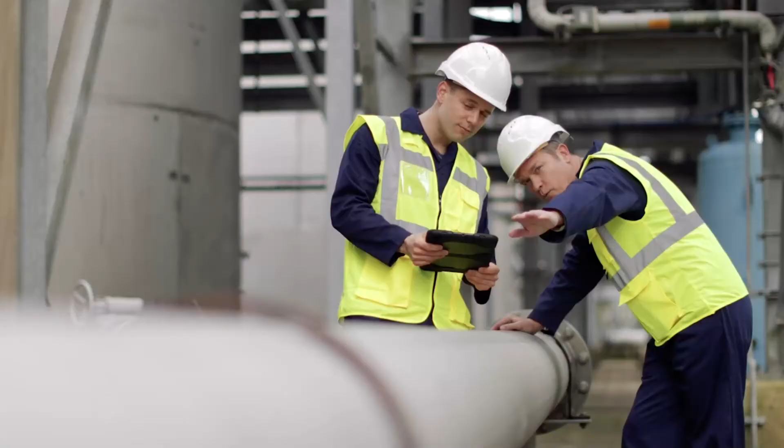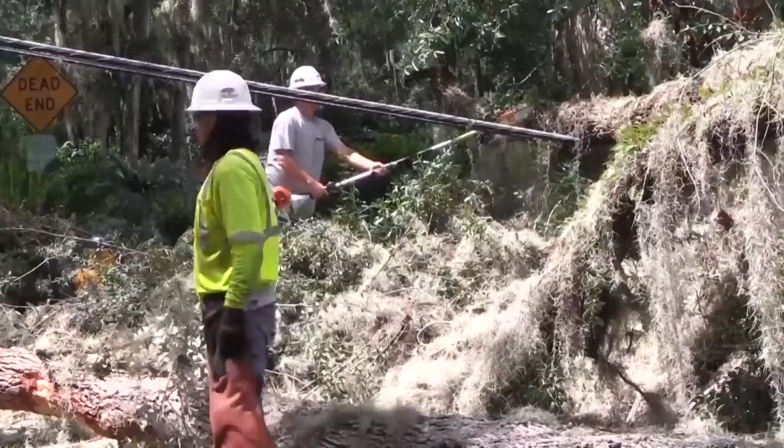We are a community of possibilities, never content with the way things are. What is possible propels us forward. We see the possibilities by knowing where your assets are located, knowing where critical issues are unfolding, knowing where your best work is being performed. Location intelligence helps you support sustainable growth, brings a community together, and helps you explore possibilities for the future.

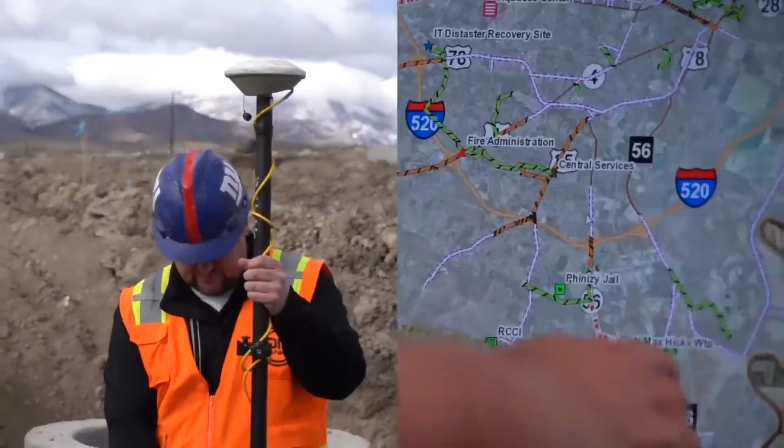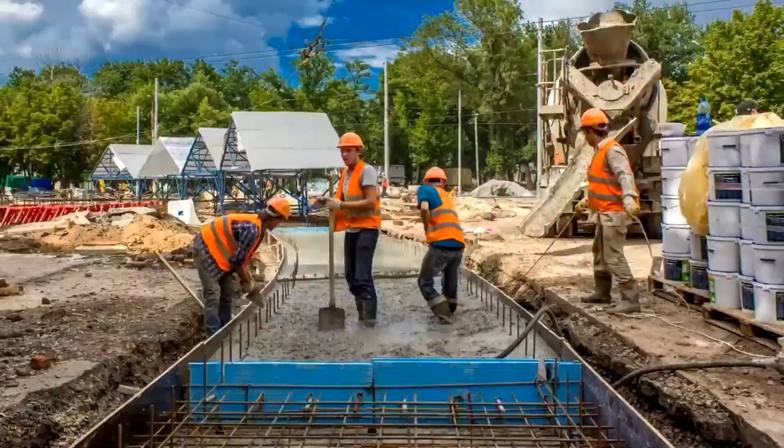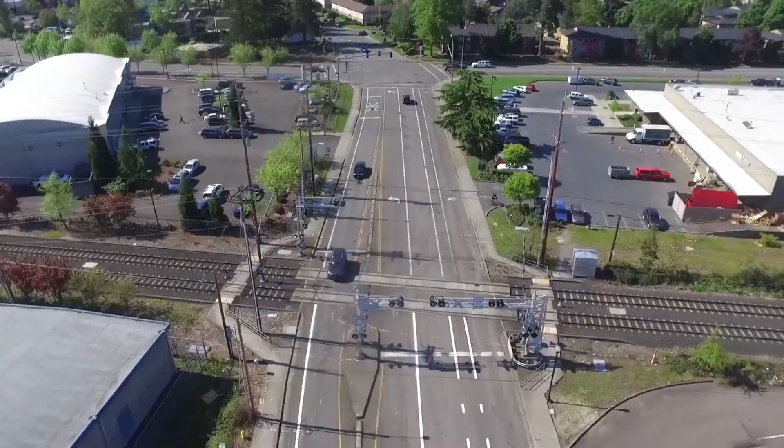You empower GIS intelligence to identify risks, reduce costs, share critical insights, solve problems, and work more efficiently. Together, we empower citizens to get involved, to live better lives, protect their neighborhood. These are the communities where we live, where we serve, and where we become connected. Together, we create endless possibilities. Together, we are transforming the way communities work by empowering GIS intelligence.

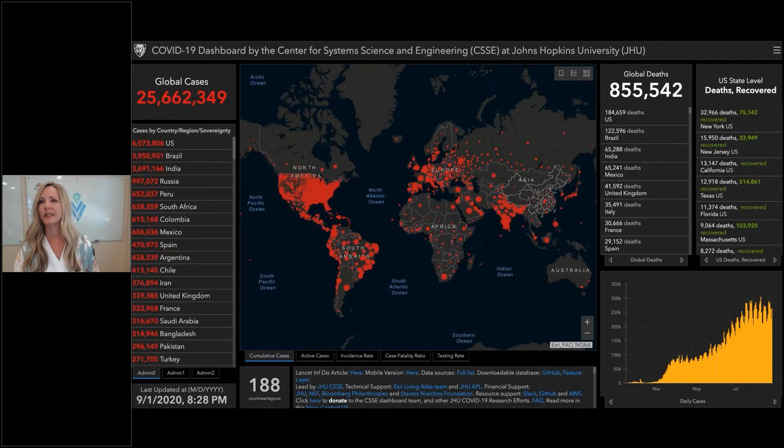And so I've got a question for you, it's actually a poll. What is the biggest change during the COVID lockdown that has impacted your organization, you or your organization? And you can answer as many answers as you want, actually you can answer them all. So yeah, it looks like the majority is we really can work from home and be productive, and not being able to interact in person. And I have to agree, I think those two are definitely fitting.

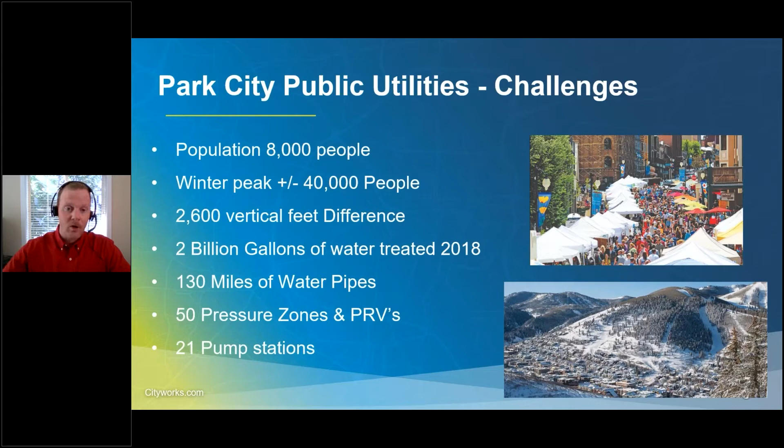As a water utility, we have several challenges, including a population of about 8,000 people with a huge surge in water demand during the winter. Being located in the mountains, we have a couple thousand vertical feet between our highest and lowest points in our service area. Although we are a small municipality, we have a fairly complex water system.

For a little background on our GIS and Cityworks programs, we have a pretty solid GIS program when it comes to our horizontal assets or horizontal data, which includes standard GIS data such as points, lines, and polygons, which represent things like pipelines, meters, hydrants, things like that.

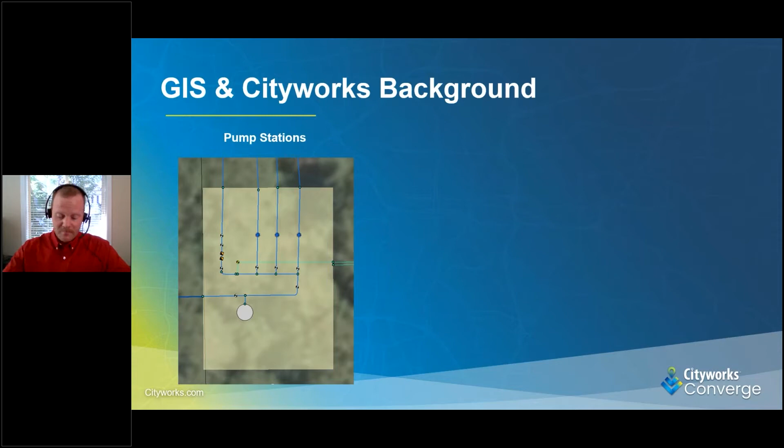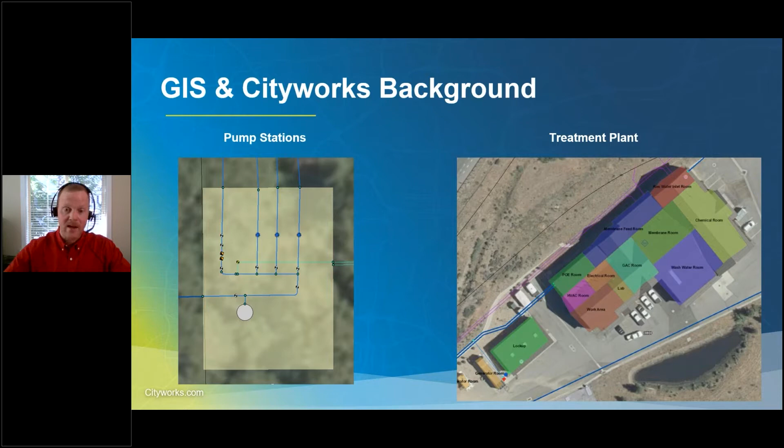But when it comes to our water facilities, specifically our treatment plants, we've had some major problems. Our pump stations have been populated with horizontal data, and starting out our Cityworks program, everything, all the work orders and inspections, were based off of those features. However, with our treatment plants, our GIS capability just hit a total wall and we are unable to inventory anything. We have 2 treatment plants and we're building a 3rd, so this is a pretty big issue.

Here is one of our rooms in our treatment plants, and as you can see, there are pipes going everywhere in every direction. There's assets just crammed together and stacked all on top of each other. There's so much going on. If you tried to draw these assets out like our pump stations, it wouldn't really be legible, or it would be really difficult to navigate in something like Cityworks or ArcMap.

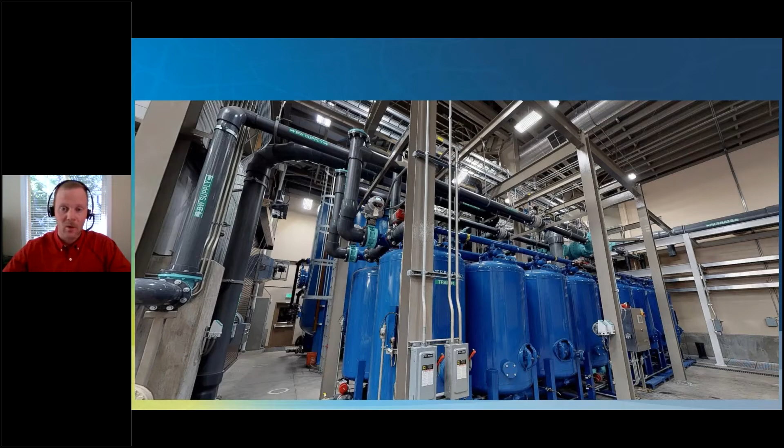Here's another room showing a membrane rack, actually 4 membrane racks, and they have loads of assets just all on top of each other. Some of them are the size of a deck of cards, so it would be really hard to represent them as a point layer.

So long story short, we had absolutely no assets of our treatment plants inventoried in GIS, which means we couldn't do any work activity, maintenance work orders, or inspections. To mitigate this, a couple of years ago we decided to launch our vertical asset program, not just to inventory our assets, but also organize them in a meaningful way, and to enable us to do work orders and inspections on these very important assets.

We decided to do this entirely in-house using our own resources, which essentially means me and a handful of other people were responsible for launching this program.

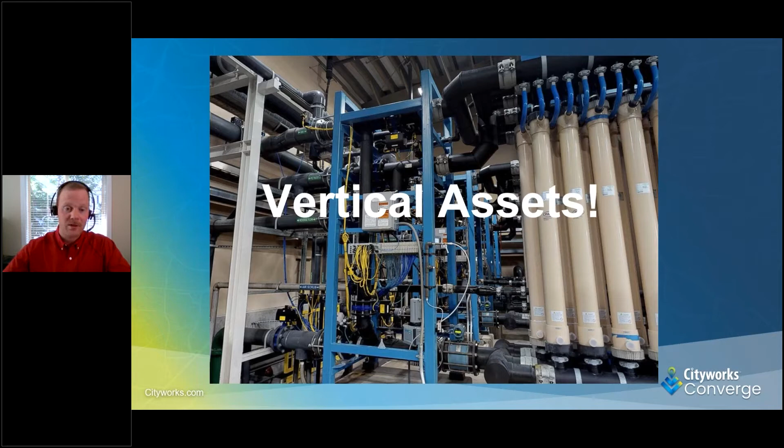A lot of you might already know what vertical assets are, but just a quick recap. Vertical assets are assets comprised of multiple components, or they are components themselves. They are typically inside complex facilities and sometimes referred to as above ground assets. They are often stacked directly on top of each other or configured in such a way that makes them not easily represented with your standard GIS data or on a map.

These assets are records in object tables, or tables in a database, with relationships to other tables, groups of tables, or features in some form of a database structure. Although these vertical assets lend themselves to very complex facilities, they can also help represent much simpler data, as you'll see at the end of the presentation.

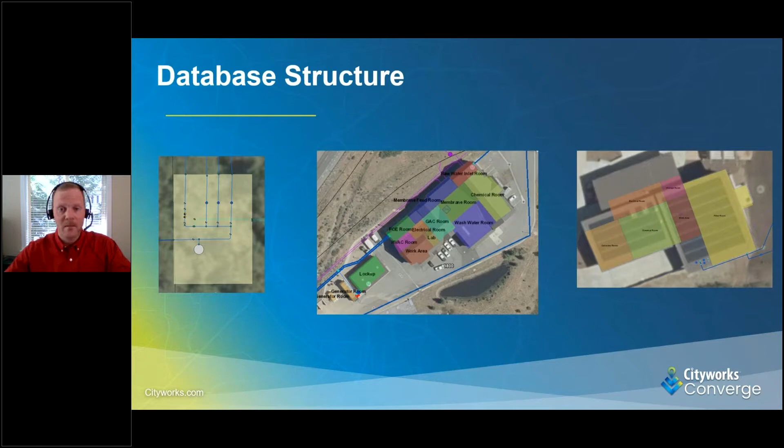To start this program off, we already had a water facilities polygon layer. All we needed to do was divide the treatment plants into different polygons, and we split them up by the actual rooms in these plants.

The next step was deciding which assets we wanted to capture, what we wanted to capture. So we created about 30 object tables to represent everything that we wanted to capture.

Once we had that established, we created this hierarchical database structure, starting at the water facilities polygon layer up top, which relates to the system level, or system tables. These tables don't have any assets themselves; they just help group the object tables, which is the third level. This level is where all of the assets live, or all the records and assets are.

So this is how Park City set up our structure. It's really customizable and you can configure it any way you want. We originally started with 4 layers, including a process layer, but after a while we determined our system wasn't necessarily complex enough to justify that extra layer. So we changed it to 3, and it worked much better for us.

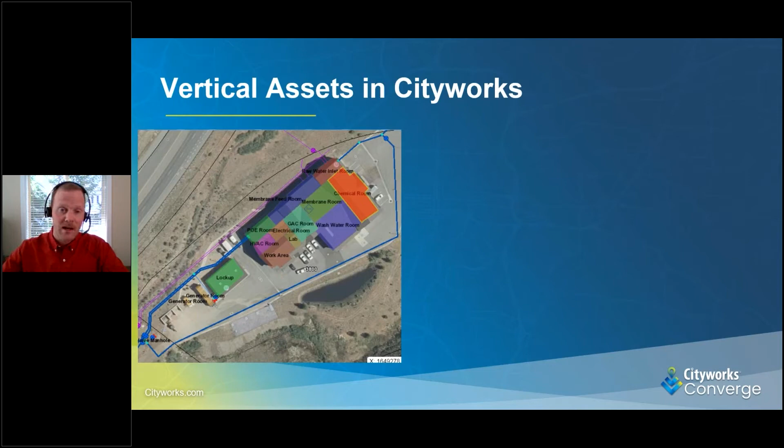What's really more impressive here is the assets that aren't being shown. In our system, we have about 3,000 vertical assets collected, and it's awesome that we can instantly sort through all this stuff to find the exact assets we're looking for. It's so much faster than trying to search through the asset search tab in Cityworks. So this is a really efficient way to do this.

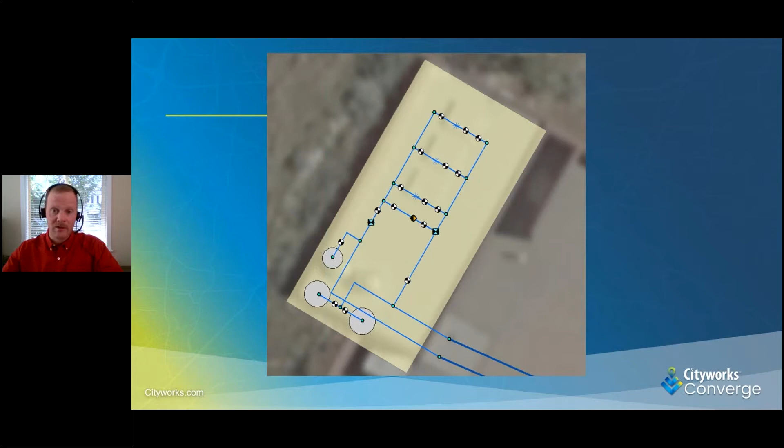All of the official inventory and all the Cityworks stuff now for anything inside a water facility is pointed at these vertical assets. This is also a good demonstration of why we set the database structure up the way we did.

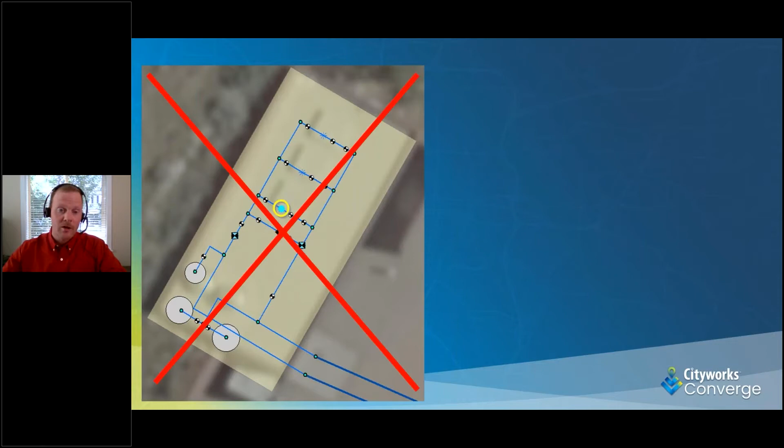All right, a quick recap: in the past, to create work orders we would select these features in the pump stations to create work orders and inspections off of. But now we no longer do that. Instead, we select the polygon itself and then navigate through the asset hierarchy to find the assets we are looking for to create work orders and things off of.

So this is how our vertical assets look in Cityworks. Now we're going to briefly talk about how we're using Cityworks with vertical assets in our department. Starting with the distribution group, they've been using Cityworks the best, and they are our best group of Cityworks users in our department, primarily because they started a long time ago when we had Cityworks running off horizontal assets.

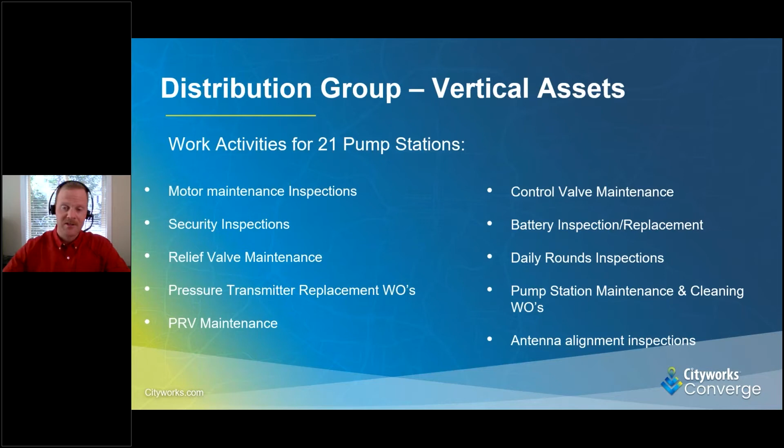Here is a list of work activities they do. They work with meters, motors, valves. They do daily rounds, inspection on SCADA equipment, and all sorts of stuff for our 21 pump stations.

Here is a quick example of an inbox for our pump and motor maintenance inspections. Pretty straightforward. As you can see, for a general work order you can't tell if the asset is related to the work order, if that's a record in the table or pointing at a feature. So this really made the transition easy for the end users when we moved to vertical assets.

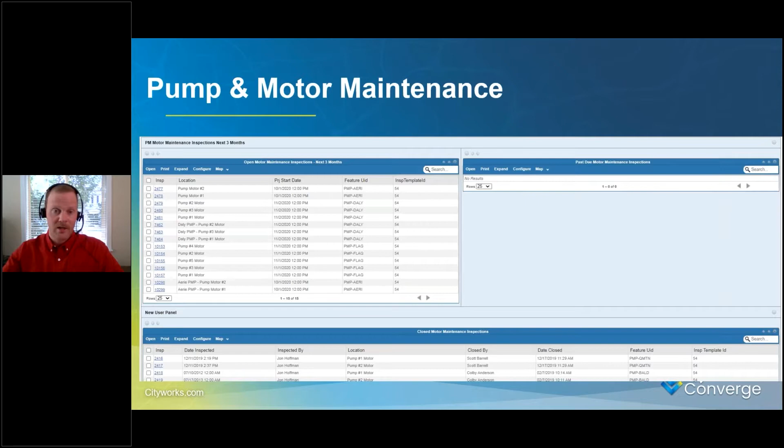All right, really quick, we're going to move on to the treatment group. They are new to Cityworks and GIS, primarily because they had no way to interact with it until we developed the vertical asset system. And because they only work inside, they only work with vertical assets.

Here is a list of the work activities that our treatment group does. We're off to a good start, but we estimate we're only about a quarter of the way complete with what we want to do with Cityworks. However, those first two items, the instrument calibration and verification work orders, are a huge effort and a major milestone for our treatment group. It consists of about 300 very important work orders every month that we're now capturing in Cityworks. So they're doing an awesome job.

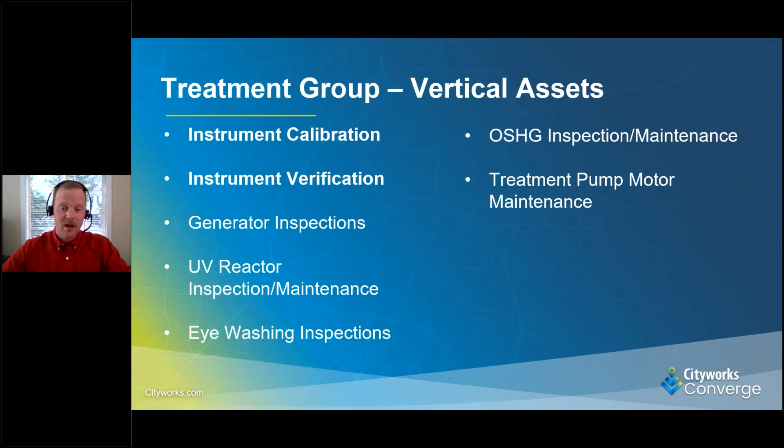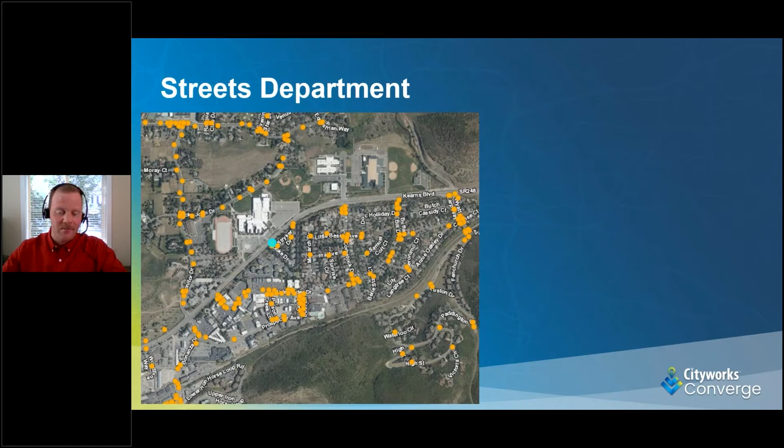All right, really quickly, aside from the water department, I also manage the data for our streets department. And one day, after working on the vertical assets for treatment, I was trying to take a break with the traffic sign data. After a while working with it, I was like, you know what, screw it, I'm going to convert this into some sort of vertical assets as well. It's really a similar concept, but just a magnitude simpler.

So this is nothing necessarily new or special, but in a way it's a type of vertical asset. It's an incredibly simple, yet effective form of vertical assets outside of a complex water facility.

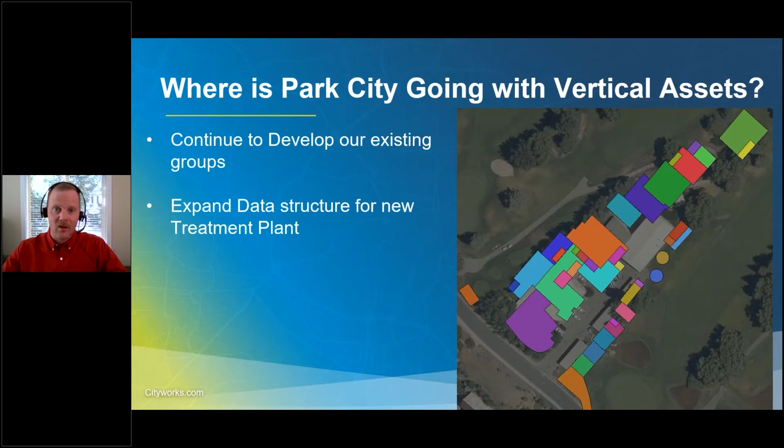So where is Park City going with vertical assets? Aside from further developing our Cityworks for the various groups we have, we are also in the process of building yet another water treatment plant, which is more complex and intricate than the last ones. So we are going to need to create new object tables and new systems or groups of tables to capture all that new information for the new treatment plant.

So thank you very much, everyone. Thank you for your time. Really happy to be here to talk about what Park City is doing. Does anyone have any questions?

Hey Cindy, you might be muted.

Thank you, we do have a few questions. Thank you for that presentation, that was awesome. Here's one - because we're running a little behind, I'm going to just go over one question here. As a small utility doing all of this on your own, how did you go about collecting all of your assets for your treatment plant?

Yeah, that's a great question. We really took two approaches. The first, for our pump stations, we had just a massive effort and wave of people trying to do this. There'd be about 15 of us, and we would go to each pump station and go through every single asset. We got it done in about 4 months, but it took a lot of time and effort. The second approach is what we did with our treatment plants, where we took incredibly small baby steps collecting this data. Really, we let the CMMS, or Cityworks program, determine which assets we were going to collect next.

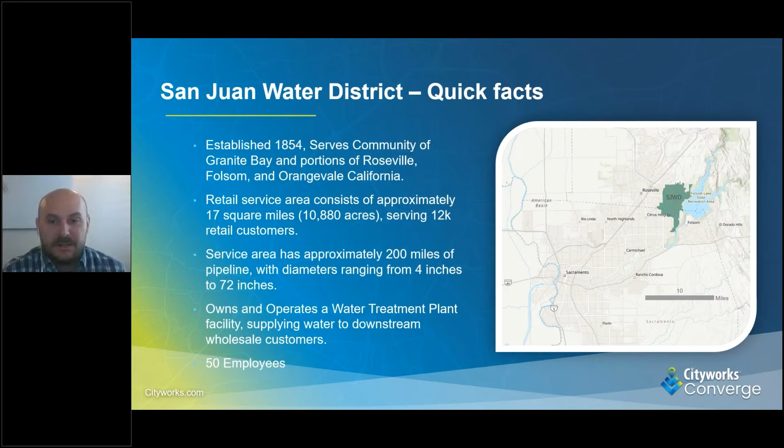And they have about 50 employees there. What we did is set up an enterprise license agreement with Esri, so we now have 50 named users for the enterprise system. Anybody that wants to go in there and contribute or make edits is able to do that.

This is a little bit about the needs assessment we did to start out. We wanted to identify all the other supported systems we wanted to connect to, and also make sure we build a system that's not just some special custom developer system that cannot be maintained in the future. We want to make sure it's using Esri software with some custom widgets connecting things, but mostly out-of-the-box configurations we could customize to their needs, while still using the base functionality and base software.

We want to be able to integrate with CMMS, the hydraulic model, and their customer information system. So bringing all these pieces together - they started in CAD, and that CAD environment is not very shareable or usable by other people.

So we're bringing that into the GIS environment where it's now the center of all the information the district needs. We also wanted to bring in the document management piece, where all these hanging files and big flat files that were in the map room are now digitized, scanned, and available in the web map that field service crews can use.

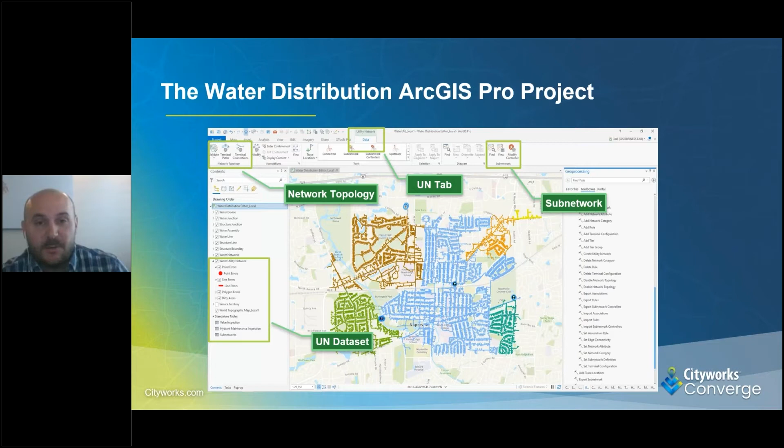So I'll go next to one of the key applications we implemented, bringing in several of those integration pieces: the San Juan Water District water map. It's the system map that used to be a map book San Juan Water handed out to their employees, but now it's in digital form. Everything in the system is a REST service, so anytime editors make changes, it's immediately available to people on the tablets.

The map books, as soon as you print them out, are out of date as soon as somebody starts making edits. So in the system map, we have the distribution system, the water treatment plant, a land base including parcels and buildings, and the CIS data, all in one application.

So like I mentioned before, if field crews are out and have a leak or something like that happens, they can run a trace right in the web application, identify the customers, export out a CSV of those customers, and send it off to customer service. Or if they have a third-party auto call system, they can set that up to automatically notify the people part of that network.

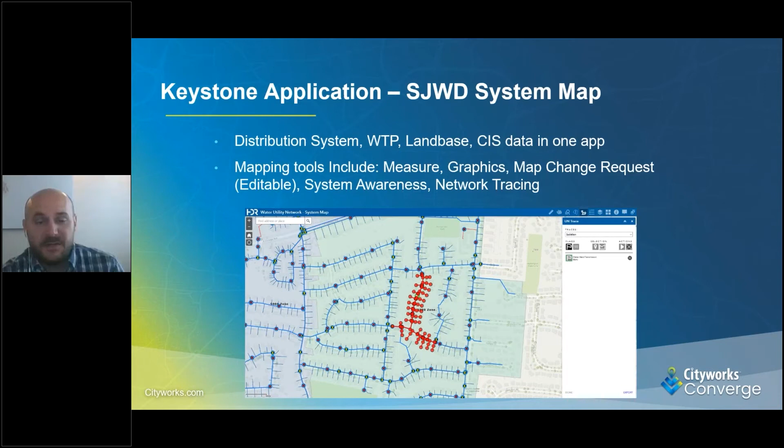And now I'll get into a little bit about the setup.

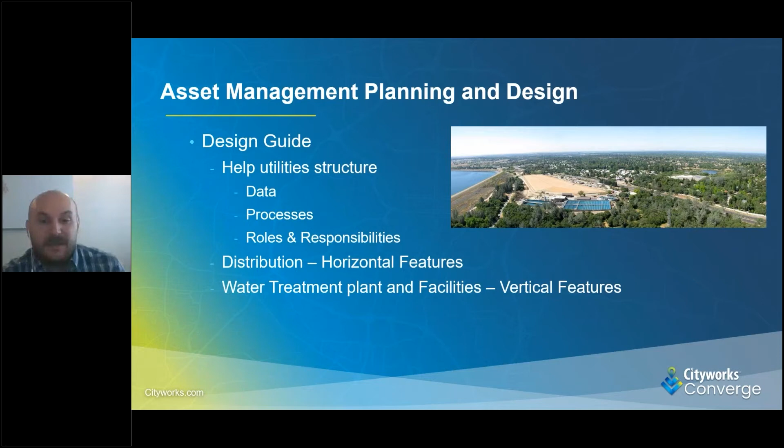The horizontal features are a lot easier for me, since that's typical GIS stuff we're used to working with. The vertical features weren't that bad either, we just had to create some extra relationship classes. I'll talk a little bit about that in a second.

In the GIS setup, you have a base schema from Esri for the water distribution network, but you want to add some other class-specific attributes and characteristics you want to capture. You can easily add any field you want to the utility network, they just recommend you don't take any away, so you can add as many as you want. For anything not spatially located, we created an asset table used in both horizontal and vertical assets, things like electric control panels that weren't part of the water utility network, captured as a non-spatial object in the asset table.

So this is what we started with, and we digitized these boundaries and then brought in the different components or pieces of those different systems. So you have sedimentation, the different floc zones, things like that, bringing more and more detail.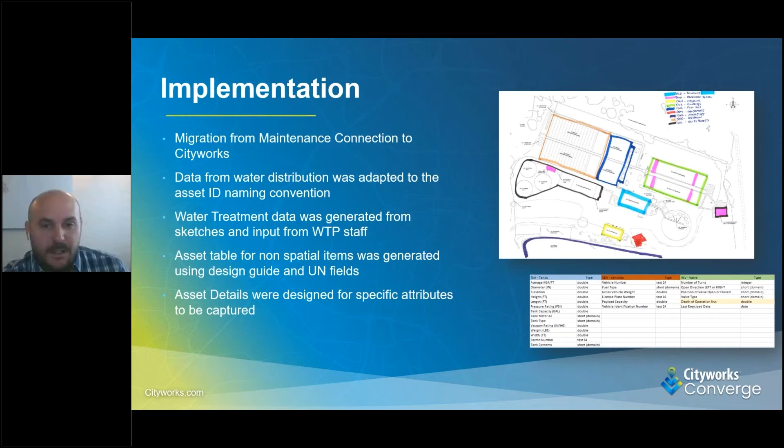There's a lot more detail, like some asset details we wanted to keep, so we created these detail tables that would collect these class-specific attributes. And here's a little bit about the relationship classes and how they're set up.

To model these relationships, we did a water device to structure boundary - so that would be like all your valves, pumps that are part of the pump station, getting connected to the pump station. You have the asset table that goes to the devices, so that would go maybe to a wholesale meter. There might be some sort of radio or something like that connected via relationship class that way.

And then there might be some more details that you want to include, and that detail will be connected to that asset table. That's just how we did it. I'm sure, like Scott said, you do it whatever fits your agency, but this is how we did it.

Again, like I mentioned, the horizontal assets are pretty simple - there'd only be maybe one level in the hierarchy, maybe two. But the water treatment plant had about, I think we're on 5 now, if I'm not mistaken. And again, that can be up to you on how you want to design it.

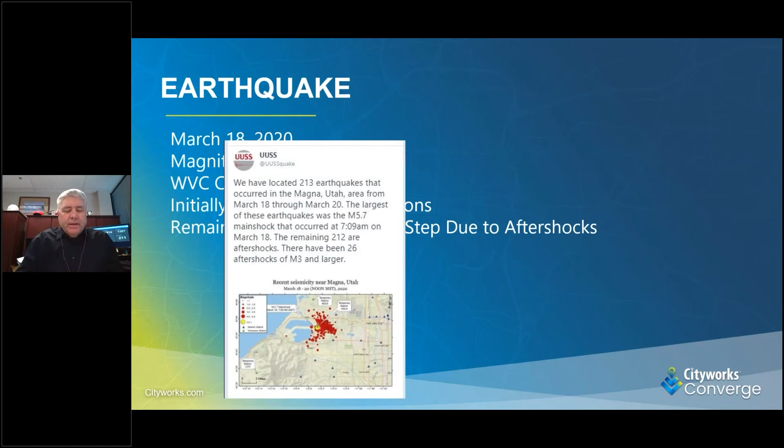In the two days since that earthquake, we received over 212 aftershocks. The largest of those, greater than a magnitude of 3, we had over 26, and these were felt all the way from Provo to the south to Ogden to the north. Out of an abundance of caution, it was determined to just go with an online presence only, and with COVID-19 and everything, we decided that we would just maintain the offices themselves closed for the rest of City Hall.

One of the major damage areas we had was a manufactured home residential park close to the border of Magna. In this case, there wasn't really much damage to the buildings other than they fell off of their foundations, so they all had to be replaced and restored.

In this particular subdivision, we had over 60 homes affected, and I think in the total subdivision there's probably just over 100, so we had a good substantial amount that had to be repaired. A lot of the damage we saw throughout the city was minor in nature, but substantial enough that we had to report it and repairs would be needed. Thankfully, we did not have to evacuate any buildings or have any others collapse other than the homes we've described.

So when an inspector goes out and does an assessment for this, we usually hand them a stack of papers, a form called an ATC 20. This is a rapid assessment of the damages that have occurred, and basically it's on a grading scale of: is it habitable or is it not? Is it still standing? Is it completely gone?

We usually hand these out, but we'd just gone paperless, so we had to figure out a way to handle this situation. Usually with these forms, the inspectors would go out during the day, fill out the forms, and at the end of the day come back with a large stack, which they would then hand off to staff who would transfer that into spreadsheets of some sort.

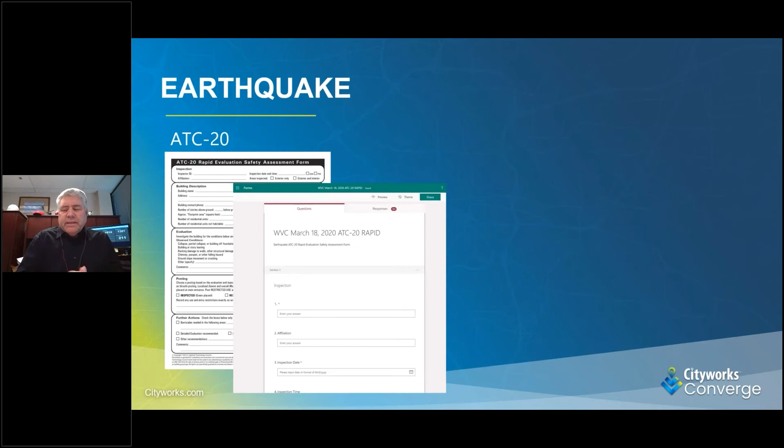And of course, within Cityworks, utilizing Respond, we have the ability that the inspector in the field can go in, and thank you very much to Cara and Gabriella in Cityworks in helping put this together.

But we now have an ATC 20 form that's dedicated, and a portion of the database is set for this, where the inspector will fill out this form in the field in their tablet or their phone. They'll get a graphical representation of where they're at. It'll be pinned with a color marking of sorts or a different shape mark that will identify the severity of that information.

And then all of that is gathered in real time and delivered to the EOC through a dashboard where they can now see the different levels, and they can see the mapping, and they can see the charts, and we can configure this to whatever they need to see for that day, so they can have a real quick response. They can know we need to get their resources to this area as quick as possible. So we were grateful for that.

We haven't had a chance to implement this yet, and praying we'd never have to, but this is there and this is available. And if anybody wants to, it's freely out there for whoever's using Respond, that if you want to put this in there, it's not just for earthquakes, but it can be easily tweaked for tornadoes, hurricanes, floods, or whatever else may be out there that needs to be taken care of.

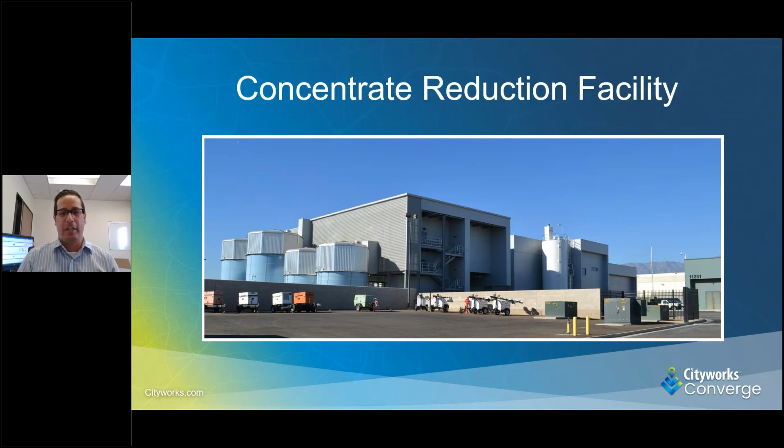This is where our challenge came in. The deputy of water operations asked us to streamline work order creation, not just for everybody, but specifically for our concentrate reduction facility. This facility is one of one — there's nothing else like this in the world. It's a huge facility.

It has a small footprint, but it's 4 levels of equipment. Each floor has pumps, motors, and different items that can go wrong. We have over 2,500 assets in this facility, and we had to identify and collect these and create some vertical tables.

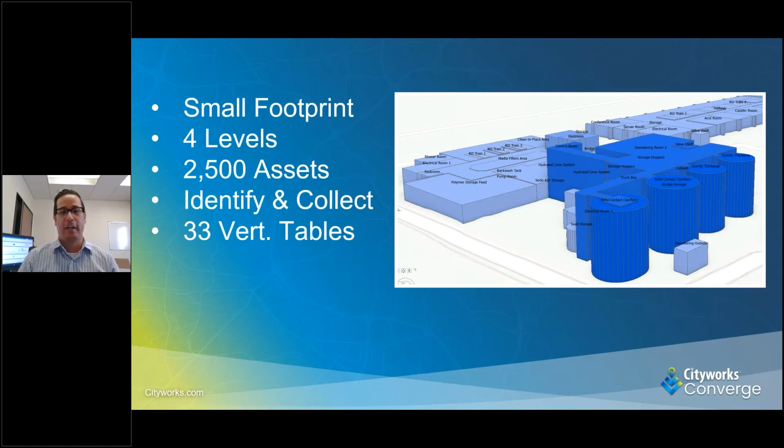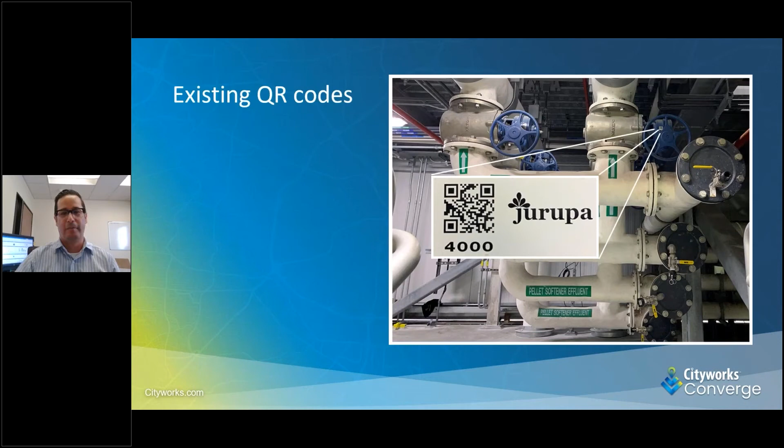So let's talk about what we did here. We had to use existing QR codes that were already in the facility. Our solution — we worked with Miller Spatial to come up with using Survey123, JavaScript, and Respond 2.2.

The initial thing was to collect and identify. Here are a few of the guys who were out there collecting every day. It took us about a month and a half to get all these assets into our GIS with vertical tables, making sure we knew where they're at, identifying them, and relating the asset tag or QR code that was with them.

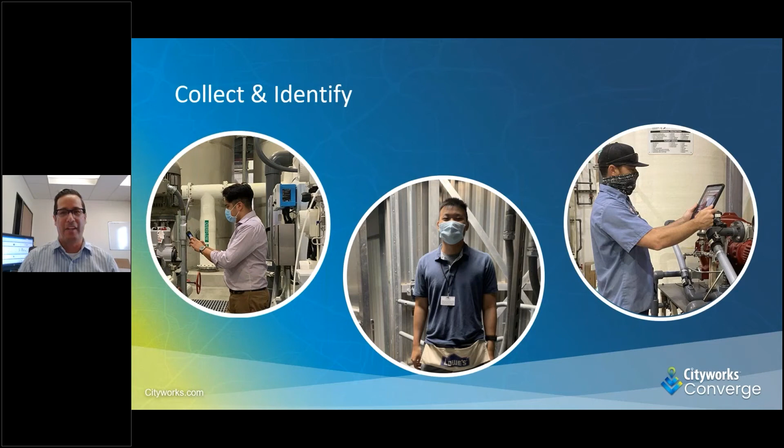This is our vertical tables, and we do want to thank Scott from Park City. We used his schema for this, and he was more than willing to share that with us. It was great, helped us out a lot. So thank you to Scott.

We have 33 of these vertical tables. So then we created a view table to pull in the information from those vertical tables.

With that, now we can use Survey 123 to actually scan the QR code. Then once the QR code is scanned, we can go to the JavaScript, and the JavaScript will pull up a dynamic URL. From there, it'll pull up Respond, giving us that asset that we scanned.

It gives us all the details about the asset, including a picture, total cost, work time, anything we might want to know when we're out there.

And then we create a work order. Very simple to do, you just walk right through it and create the work order. And then to finish off, we have a work order. So this is a very simple process, but really hard to get there. A lot of time scanning, a lot of time collecting assets, a lot of time trying to get everything in there. But now that we have it, it's a pretty seamless process and it works really well.

I'm going to give you a short little demo here of it actually going through the process. This is the person selecting that they want to do the survey with the scan. Now they're loading the survey, and they're going to scan the QR code.

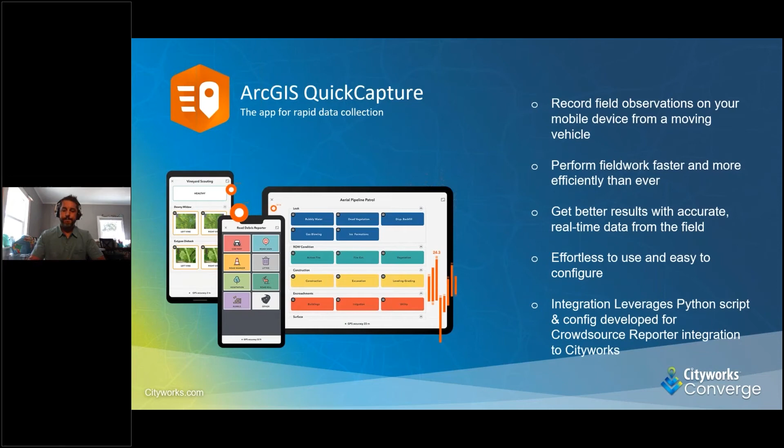Okay, so let's take a look at one back here. Okay, we gotta get the slides. All right, so there we go.

So how does this actually work? It starts with a user creating a new report in the QuickCapture app. They can add an image and any additional information required by how the app was configured for that use case. Then in the final step, they can view it, make sure the location is correct, adjust if needed, and then quickly click send.

In the background, a scheduled task is running, a Python script with a configuration file, that takes that information, packages it up, and using the Cityworks Service Request API, pushes that request into Cityworks. So a new request is created in Cityworks with all that information.

That's one direction, but this is a two-way integration. In Cityworks, if a user then updates that service request, makes a status change for example, that can be caught by Cityworks Action Manager, which says, hey, this just happened to this specific request. Let's go ahead and fire off this webhook associated to this action. Then using the ArcGIS REST API, that information, in this case a status, is updated in that record back in either ArcGIS Enterprise portal or your ArcGIS Online account.

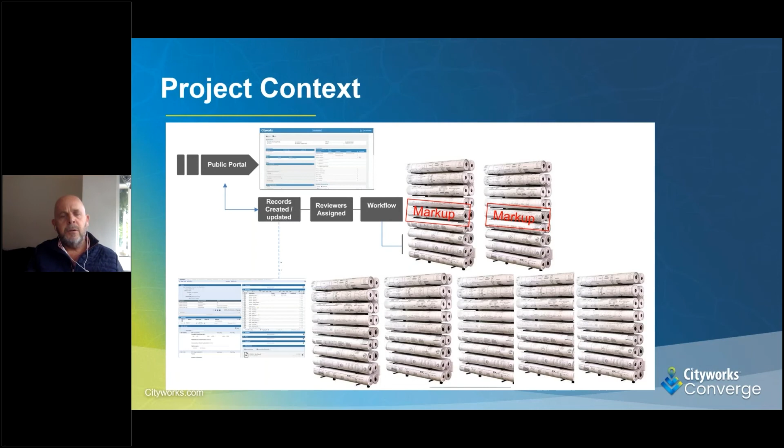I put this together because I felt it's important for organizations to understand this is not a difficult thing to do. Electronic plan review has in the past been seen to be complex, onerous, and requiring a lot of expertise and time to deliver, but we're just not in that place anymore with cloud-based integrated electronic plan review. Things have really changed, so we've got quite a small team to deliver a project such as this.

We had somebody involved in leading the business system side - in this case, obviously Cityworks - somebody who owned the business requirements, the building official and their team from a user acceptance perspective. We had some oversight from Cityworks, which was very helpful - not necessarily required, but extremely helpful for all of us to have some referral, reference and oversight, as this was one of the early implementations with Cityworks. Then we had one from the team of DigEplan, and our implementation partners, TruePoint, who project managed and helped support and deliver the training as part of the project team.

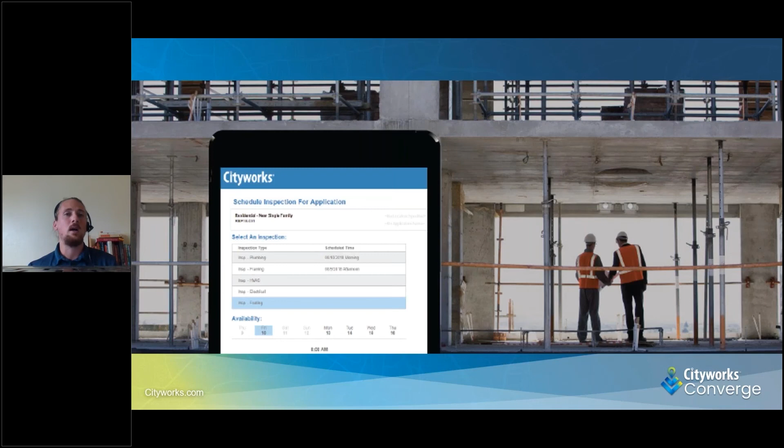So I was going to kind of frame the conversation here, but in the interest of time, I'll echo what Rob and Jerry had said—a line like this could be typical of people wanting to apply for a building permit or renew a business license. The motivation behind a public-facing application is a more convenient experience: on your own device, your own schedule, you can apply for and interact with these permits. Over the past few releases, a big focus within the public access application development has been increasing the engagement an end user can have both before and after they've submitted an application. At earlier releases, the intake process was the meat of public access, but we realized we want to stay in touch with the permit process both before and after that intake.

So I'm going to jump ahead and talk to a video here. Let me hit enter quick to get that going. I just want to highlight some of these pieces of functionality that we've added.

One way we want end users to stay engaged is by allowing them some edit capabilities after they've created a case. So here, for instance, what we've added at our upcoming release is the ability to edit the application name. If we want to change this application from Spring Hill Mall to Spring Hill Shopping Center, we can do that, much like our people and case data at our Public Access 5.0 release.

Another way we want the public to stay engaged is to expand on our inspection scheduling capabilities. So now on the same permit, as I go to schedule an inspection, we've added the ability for the end user to submit comments and instructions. A good example of this is maybe for an electrical inspection, we don't want the inspector to be stuck outside. So if we need to provide a building code, we can provide them a building code right here in the comments and submit that.

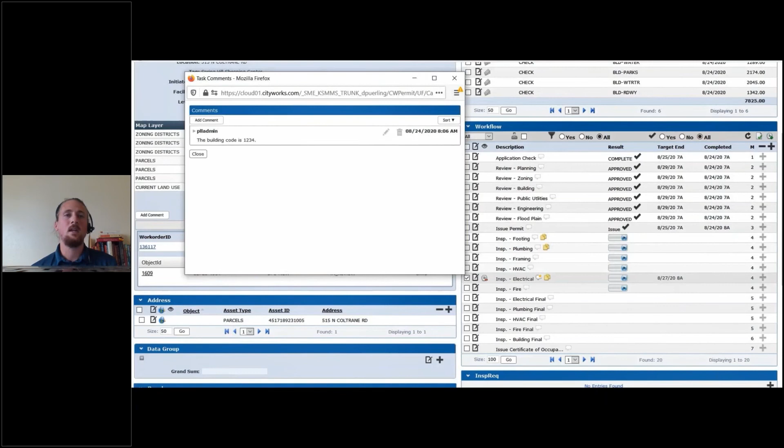Once we go ahead and schedule the inspection, we'll actually be able to increase that user-to-internal-staff communication. We'll take a look here as we jump into the Cityworks core site that the inspector in real time can go ahead and access the information just provided by that public user by going to the task in the workflow and hitting the task comments section. They can see the code to get into the building. They're not locked out. They get in, complete their inspection, and really make the process a bit more efficient.

Now, once that inspection is completed, we also realize that it's great for the public user to be able to see what result an inspection had. If we navigate forward here and we see that that electrical inspection failed, that's part of the puzzle, but it's not the whole thing. It's helpful for the end user to maybe know why the inspection failed.

So as we jump in here, we can see now at the next release of Public Access that we have exposed checklists. I can go ahead—I'm going to pause this quick so I don't get too far ahead—and we can see why that inspection failed, make the corrections really quickly in real time without needing that full inspection report, and just keep moving forward while continuing to add engagement opportunities for those public users.

Now, here we see a typical login application page for those of us who are familiar with Public Access. We can see our fields collected for the credentials and contact information, but we also wanted to allow the citizen to stay engaged even before they create any permits. We want them to be able to specify what they want to do within the Public Access site.

So here, let me see if I can get this video to play again. Whoops, I'll hop back quick. I'll jump ahead, but as we noticed, hopefully, quickly on that paused screen, we've added the ability to specify what role we want a user to join.

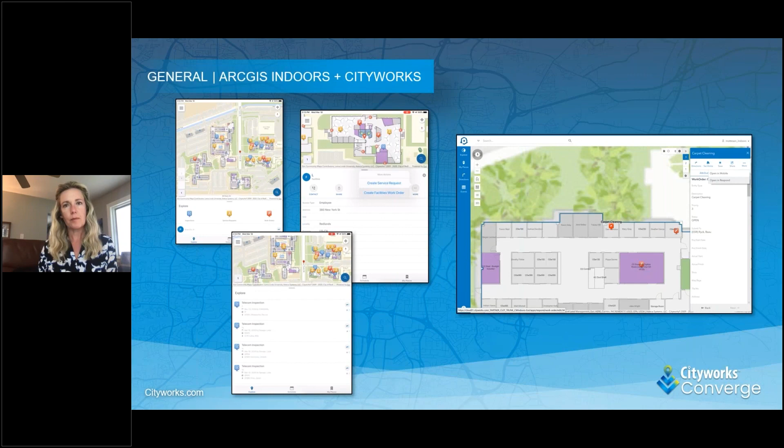This is actually just an example of a really cool project that's already underway. Some of our clients, City of Raleigh, North Carolina, are already moving ahead with Indoors and Cityworks. This is an example they provided us of their treatment plants, already underway in Indoors, and how they're looking to bring that information in and start to represent it, then applying Cityworks to get into the asset management and operations of these assets.

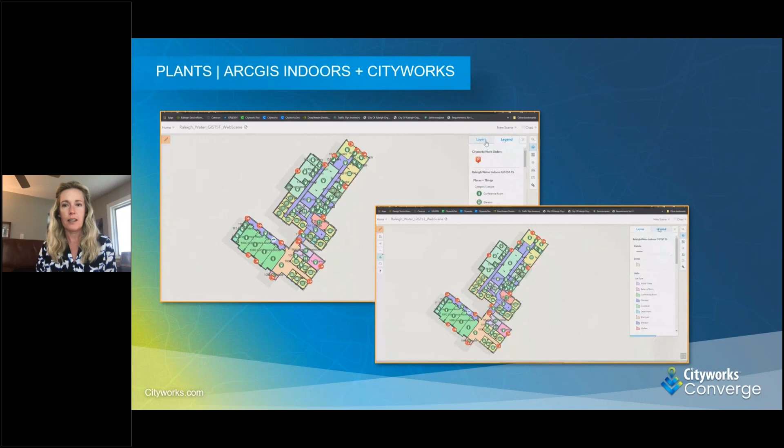Along those same lines, as we're looking at some of this functionality with vertical assets, and even just in general for those field users, being able to quickly identify the asset that you're working with, whether it's in the plant or the field, and being able to quickly bring up information about it, create new activities.

We know sometimes some of those IDs associated with those assets aren't always available off the top of your head. Likewise, depending on the number of assets you're dealing with, it's not always easy to quickly pull up on the map. So we also want to be able to provide barcode functionality.

This is now available, well, it will be available coming soon, in both Respond and the native apps. From here, organizations and users can click on that native device camera — there's a little icon we now have exposed there — scan a barcode, and it pulls up all the asset information.

You can see the previous work history, any current activities assigned, attributes, and you can also use that once the asset is selected to start creating new activities against it.

So if you're in a plant and you're just walking up to a pump, you can scan that information out in the field, scan a hydrant, and immediately go ahead and start that whole process to view when's the last time somebody was out here doing work against this asset. I need to create a new activity and just be able to go ahead and do it on the fly.

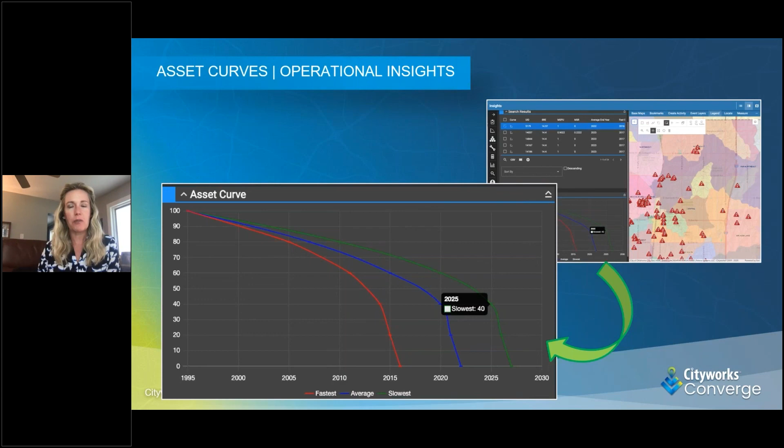And then dashboards. We've been working for a while to go ahead and start providing more tools to make them more customizable. Dashboards are something we really strive to make more flexible and really meet the reporting and visualization needs for each organization and each group.

These are the kind of tools we want to provide to really make it more flexible, make these dashboards yours, and allow organizations the ability to design these on a user basis, group basis, or across the organization as well.

That's really all I was planning on sharing here today. But again, we will be following up with more webinars specifically tied to the upcoming release, following the actual release. From there, we'll be able to dive into more details. So make sure to stay tuned for those registration emails as they come out, and be sure to join. We look forward to having you guys again.